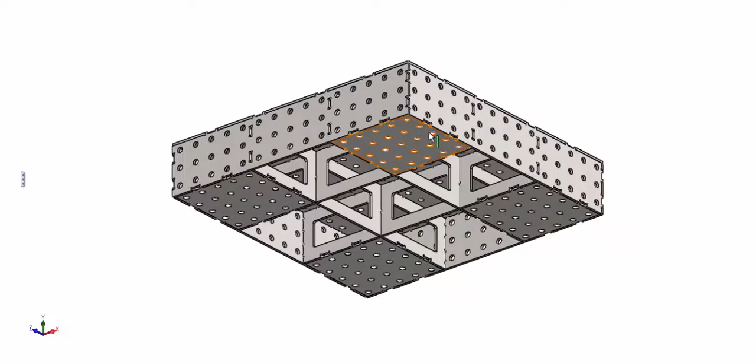Hey, it's Dave here from Tab and Slot, and today we're going to take a look at the assembly process of one of our new CertiFlat fab blocks. Okay, this is a 30-inch by 30-inch fab block. All of our standard fab blocks are 6 inches deep and have mounting surfaces on 6 sides. So you can configure these things numerous different ways and bolt them together.

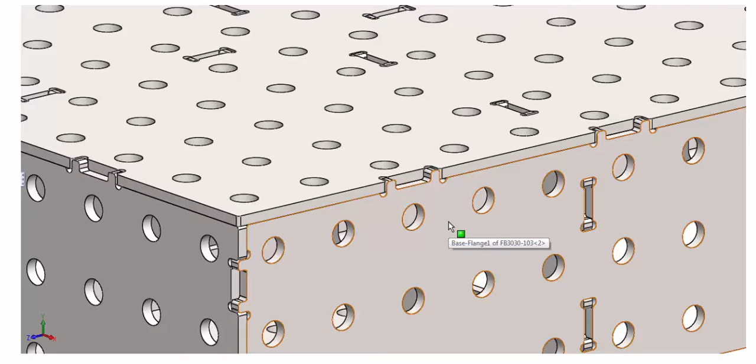You get the idea. So by now you've received your fab block kit, and you'll notice that the quality of the edges and the precision of the fit is absolutely phenomenal. Okay, it's important to understand that these parts came off of a CNC laser. Often we don't think of a sheet laser or a tube laser as a CNC machine like we would a Haas mill or a big turning center or lathe.

But the truth of the matter is, our published repeatability is 4/10 of a thousandth. Okay, so 4/10, that's 40% of 1/1000th of an inch. That's pretty tight. That's our repeatability. And we hold plus or minus 3/1000ths every single day on a lot of parts.

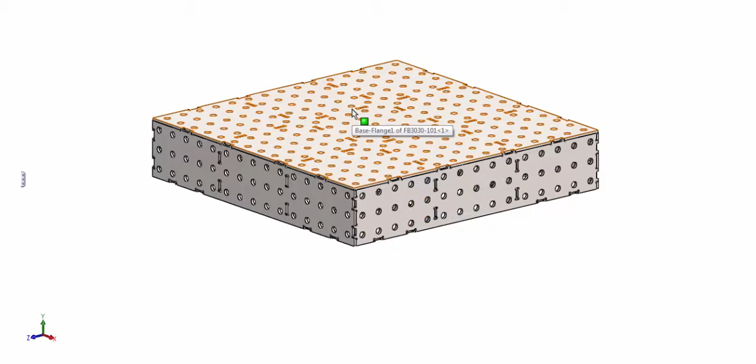So the idea behind the tab and slot philosophy and what makes our CertiFlat tables so incredibly stiff, strong, and flat is the use of tab and slot methodology, where we allow our high precision machine, our CNC laser, to do the work of setting the part flat and square. So if you understand that we want to let the laser do the work, then that kind of dictates our weld sequence a little bit. So let's take a look at how we put this together.

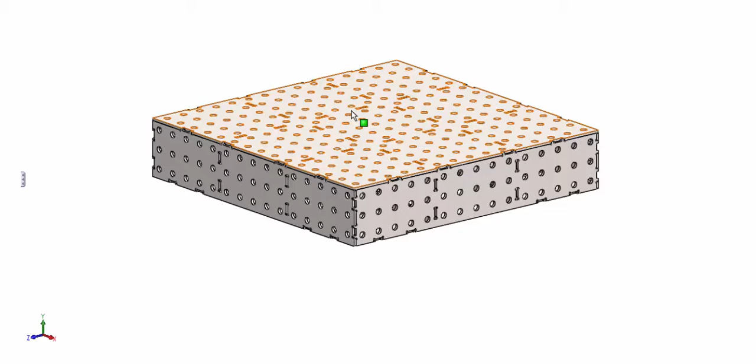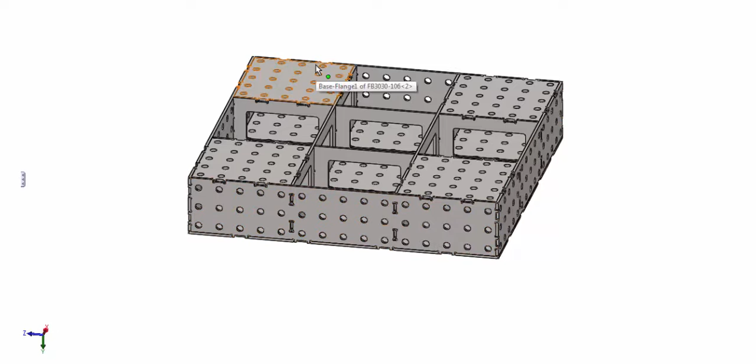Again, this is our 30 by 30 kit, and what we're actually going to do is flip this over. Now when I build these, I put them up on a workbench or on a pair of sawhorses or on top of a toolbox, but don't put it flat down on the table. What we want to do is put it up on a couple of 2x4s, okay? And let me just hide a few components here and get these out of the way so we can see what's going on here.

So the idea here is to put the heat where it can do no damage, okay? The first thing we want to do is build this structure and get it clamped to the top. So we're going to put the top down on the boards and build this upside down. Now, there's no mistaking how this stuff goes together. If I isolate these two parts, better yet, if I explode, let me do that for you here real quick. That'll be a little easier.

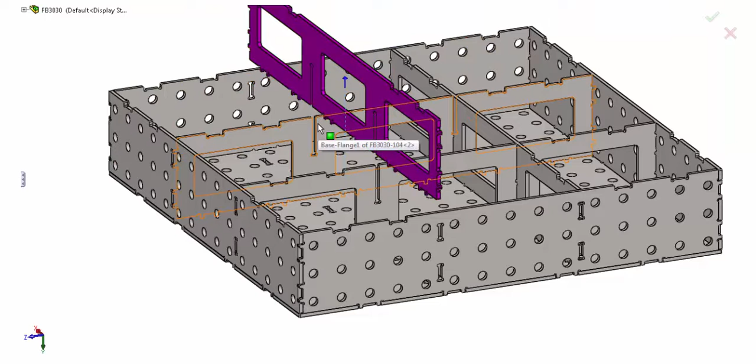So if I just move this rib up so we can see what's going on, you can see this can only go together one way, and it's pretty obvious and logical. So what you're going to do, move that back down, is you're going to put these 4 pieces together and put them into the slots in the table, okay? Then you're going to put these 2 end pieces on, and then these 2 end pieces, okay?

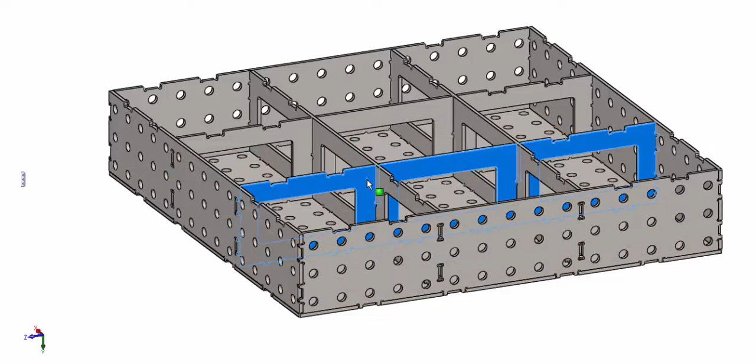Now, the goal here is to clamp all of these pieces that lie in the vertical plane tight to the tabletop, okay? Again, our precision is excellent on the laser. Sometimes there's a little burr, a little dirt that you may have to take a quick file and knock off, and the goal is to make sure that there are no gaps anywhere.

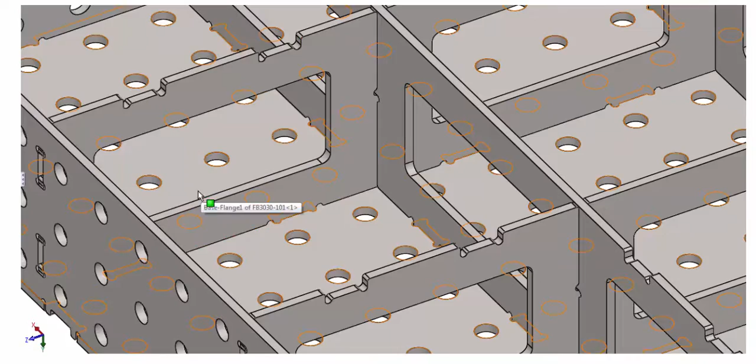And the best way to do that is to take a flashlight on the other side, shine it down at the gap, and take a look. If you can see anything more than a trace of light under there, then you need to pull this back apart and look for a burr or a fit-up problem, okay? So the way we do this is we get some 7-inch long 3/8 carriage bolts, which are very cheap. You can buy them by the pound at the Tractor Supply.

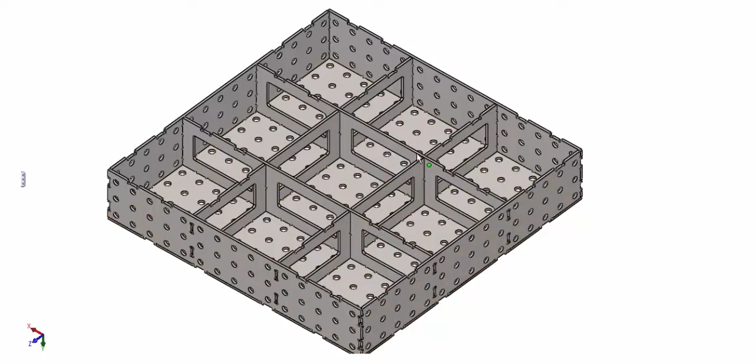And we put them up from the bottom, and then we take a couple of strapping plates and we go across these 4 intersections, and then we put nuts on. So we're going to put a bolt here in this hole and a bolt here in this hole, and then we come up alongside this. We put a strap across the X and tighten it down, because we don't have clamps that'll reach over there.

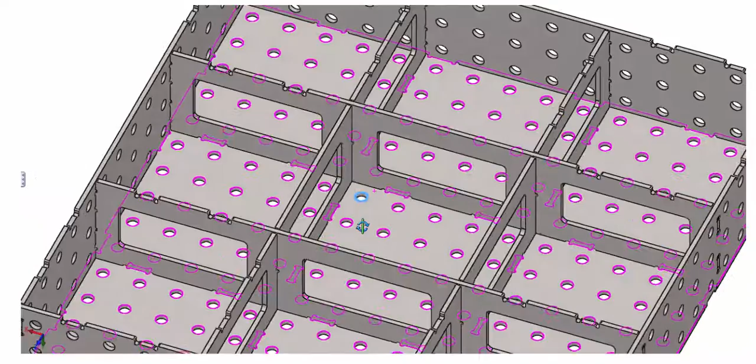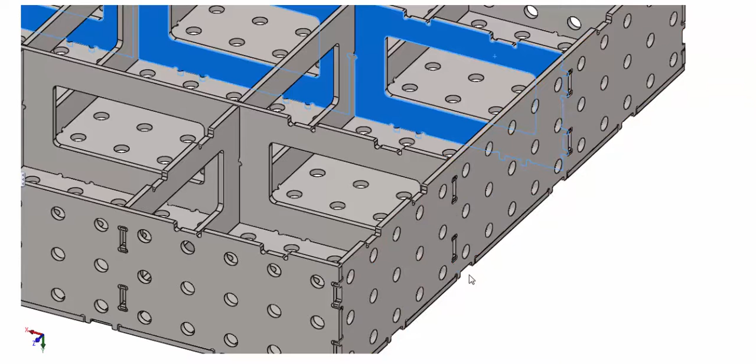Now, if you've already picked up some Strong Hand tools, you could actually just use those upside down here and screw one in there and use the pad right there and push down, okay? So what we want to do is get everything clamped to the table. Okay, the problem with that is this piece right here, because it's only tab and slotted onto these two things, it's not completely captured on any edges. If I just start clamping down on this, it's probably going to pop out here at the bottom.

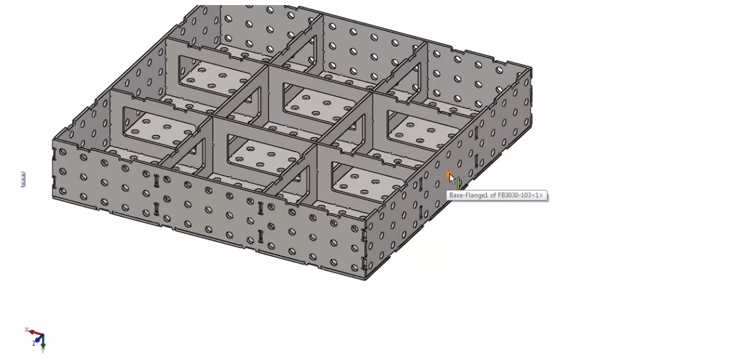Okay, so what we need to do is we need to hold these two pieces tight to these two pieces. And the easiest way to do that is to take a piece or a couple of pieces of long threaded rod, put them right through there with nuts on both sides and tighten it down. Okay? Now you want to be as close to here as possible, so use like this hole and then like this hole for this one, or this hole is actually a little bit better because now you'd be between here

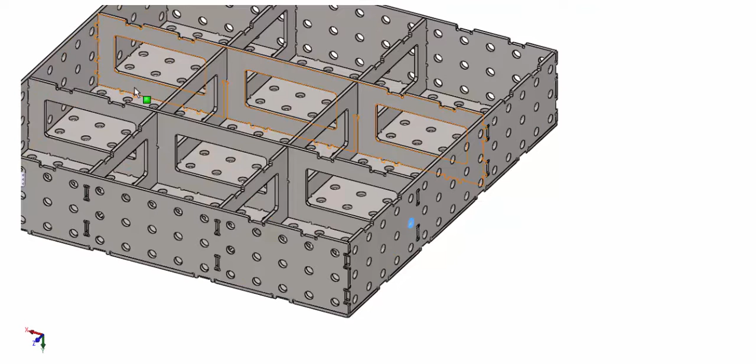and here, right? And the other thing you can do is you can put a couple of eye bolts through a couple holes and use a ratchet strap across the inside. If you have a bunch of pipe clamps, like woodworkers pipe clamps, you put those across the bottom. Okay? Everything's clamped to the top. The sides are pulled in tight against the ribs.

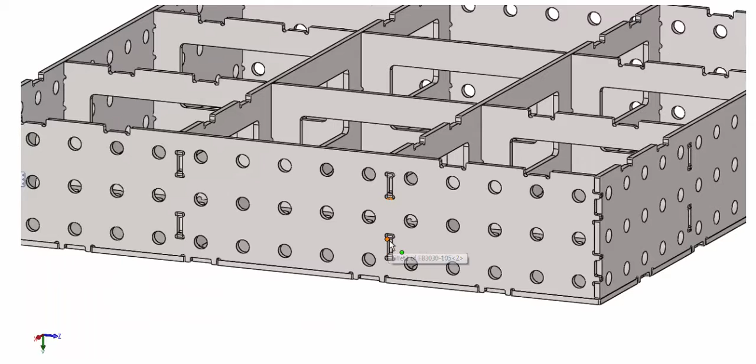Here's what you're going to do. You're going to come in here and you're going to put a little tack weld here, a little tack weld here, a little tack weld here, a little tack weld here. So we want this structure to be solid and clamped, but we don't want it attached to the top yet.

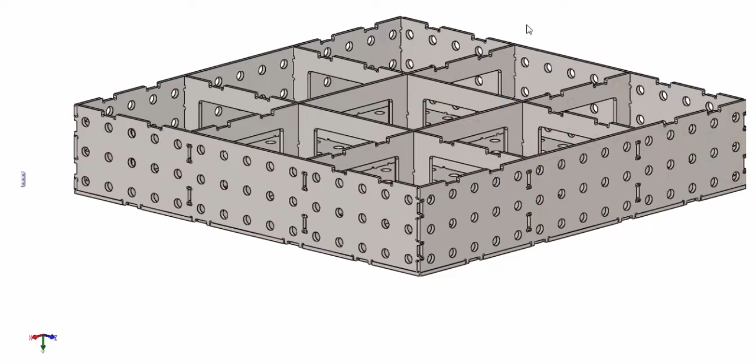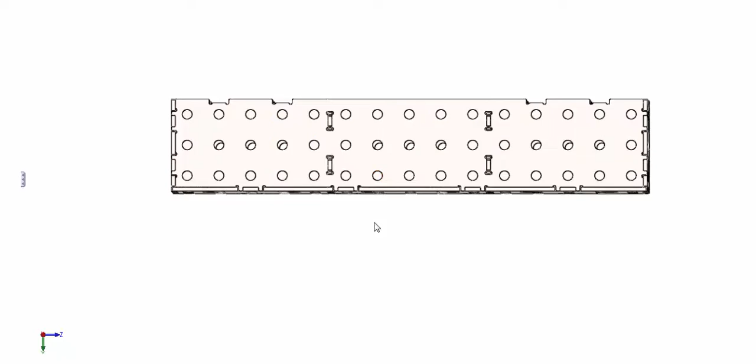From there, you're going to lay straight edges across the surfaces. Make sure it is in fact flat. You can still do all of this from the bottom. Lay your straight edges. If it's bowed down like this, right? Here, let me change views. If this is bowed down like this, then what you're going to want to do is put a block in the middle and thump it with a hammer, check it again, all before you weld it. And the idea would be to get it as flat as humanly possible before you weld.

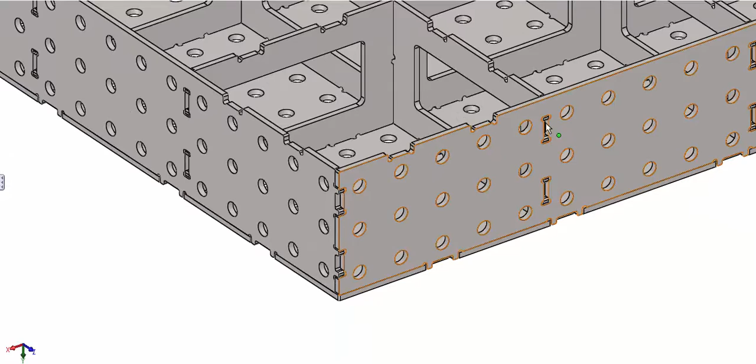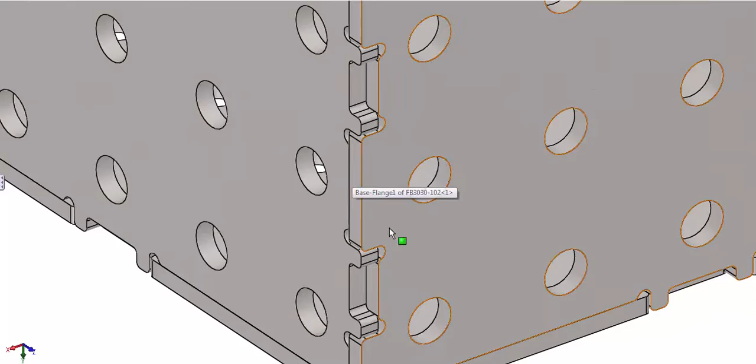Okay? Once you've done that, it's flat, it's clamped, your sides are tacked really good to these pieces. Next, we want to tack these corners together. So what we'll do, because this is all tacked up, everything's in the table, we're clamped down tight still, we want to come in here and throw a tack in each one of these corners. Okay? Once we've got this entire structure tacked together, we're clamped to the table, we've done all of our light gap checks everywhere, it's good to go. We're sure it's good to go.

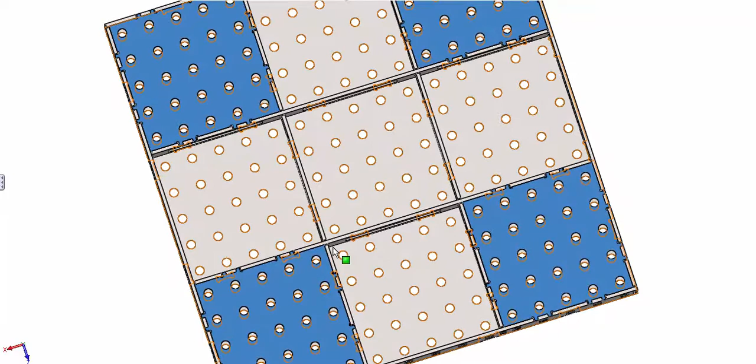Okay? The next thing we want to do is we want to go ahead and plug in these corner pieces. Okay? Now, you probably are going to have to move a clamp. I should have said that, right? Maybe reposition your clamp. If they were here and here, you're going to need to move them from here and here, right, to get them out of the way.

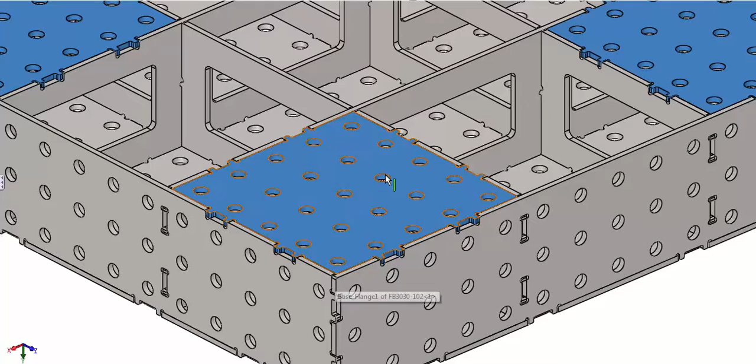Also, not shown in this video, on these plates that are blue in the video right now, one corner has a large radius. Okay? That corner needs to go to the outside because these plates are not symmetrical. Okay? They can be installed backwards. So you need to check that. And what that does is, like I said, it's not shown here, but this corner will have a big radius in it. That just makes sure the whole pattern is set where it needs to be.

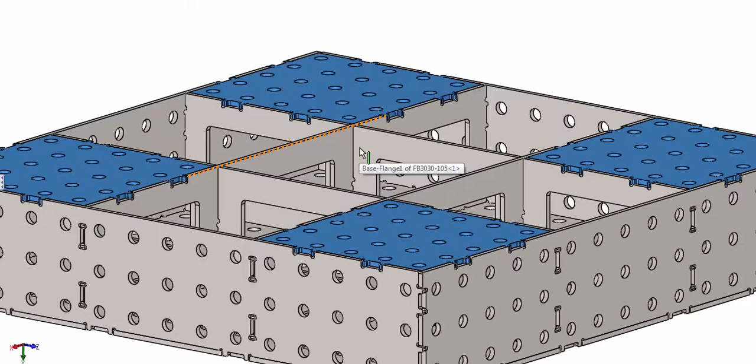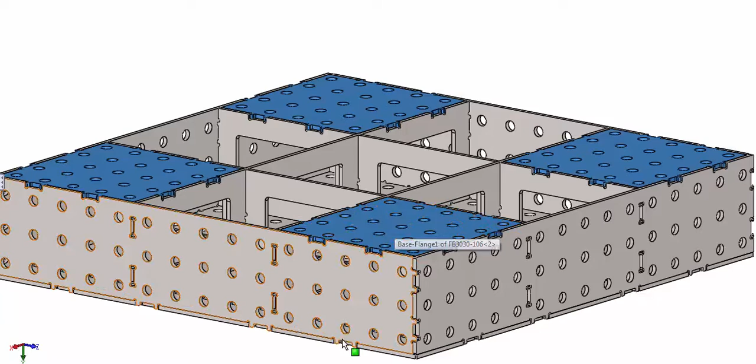Okay? So now we're going to put these four in. You're probably going to have to tap them in with a hammer. I don't want to say pound because you shouldn't have to pound them in, but you probably are going to have to tap them in. Okay? And you can see how once you have those in, the squareness is 100% set by the laser. Okay? The flatness is 100% set by the laser. So you're going to take these guys, do the same thing, find some way to clamp them to the top, right?

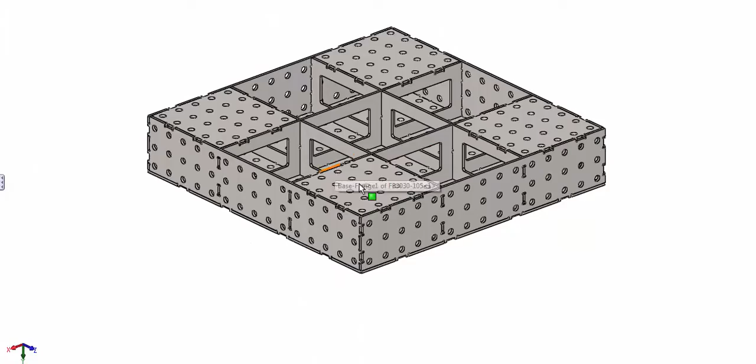So you're going to have this clamped to this and be squeezing all of this together. Okay? A couple of bolts up through the bottom, C-clamp over the top, whatever you want to do. And go ahead and let's tack these in. Tack, tack, tack, tack. Okay? By the time you have all that tacked, and again, we're using our best practices, we're going to tack down in here so we don't have to grind. This thing is going to be so stiff and rigid, it's not even going to be funny. Okay? Real simple from here.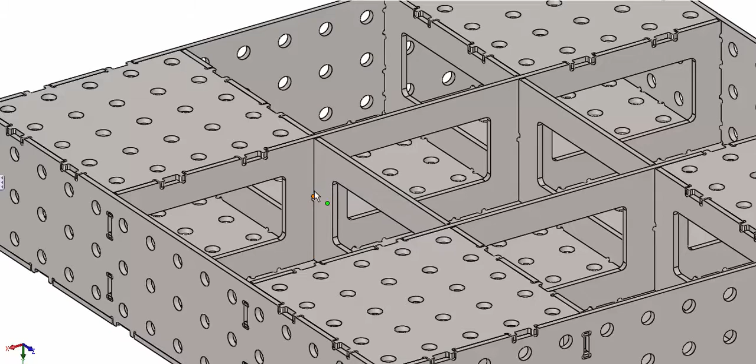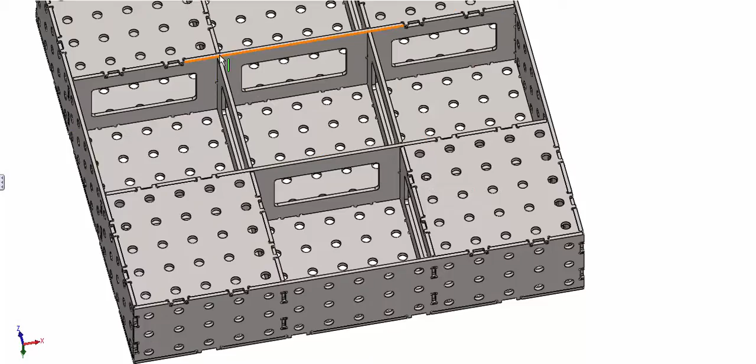The next thing we're going to do, we're going to come across here and we're going to weld the inside. Now, the way you do this is you're going to put like an inch right down the middle here, across this joint, so 1 inch, and then while it's hot, you immediately come around to the other side and do the same thing. Okay? Now, while this one's hot, before it's cooled, you move kitty corner and you do this one. Then you do this one, then you do this one.

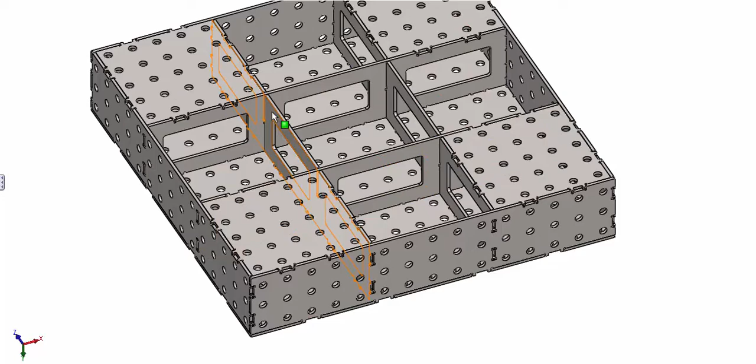Okay? Once you have those welded, we are not, absolutely not, going to weld this rib to this top. We're not welding any of this ribbing to the top. You don't need to do that. You've still got your clamps on. Everything's clamped tight. Okay? From here, once you've got these welded up, what we're looking to do is firm up this structure. Okay? So now you're going to weld here.

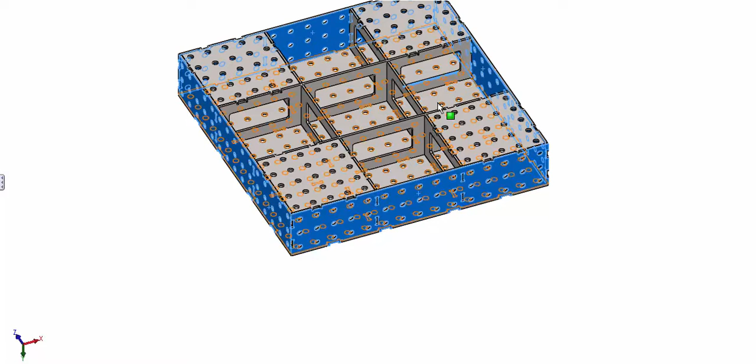Then you're going to move to the other side of the table, do the same thing. Come back over here, do this. Move to the other side of the table, do this. And get these 4 sides firmly connected to this inner structure. I'm going to turn all this blue. Okay? So you want to get all of that connected. Once all of that's connected, now we're going to flip this over.

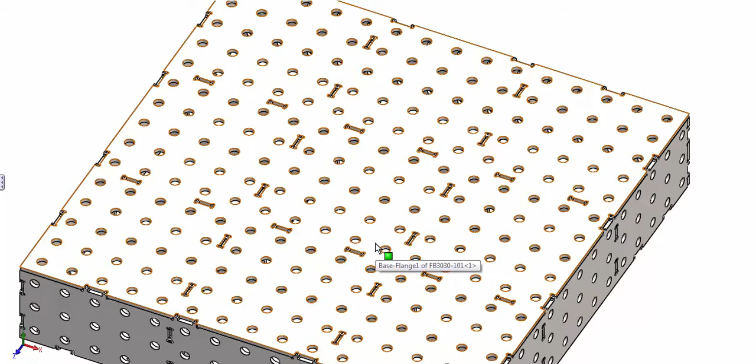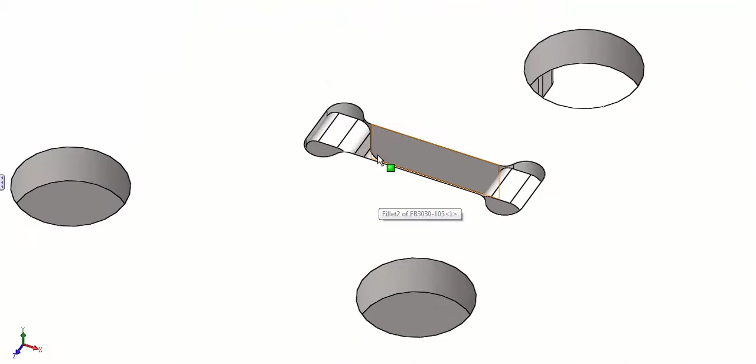With everything still clamped, we're going to check it one more time, because believe it or not, even with that structure welded, if you were to smack it with a hammer, you could move it 3 or 4 thousandths if you needed to. Check it, right? Now, we're going to start in the center, we're going to go kitty corner, work our way from the center out, and we're going to go tack, tack, tack, until we have a tack in every slot. Again, stay down inside here. You won't have to do any grinding.

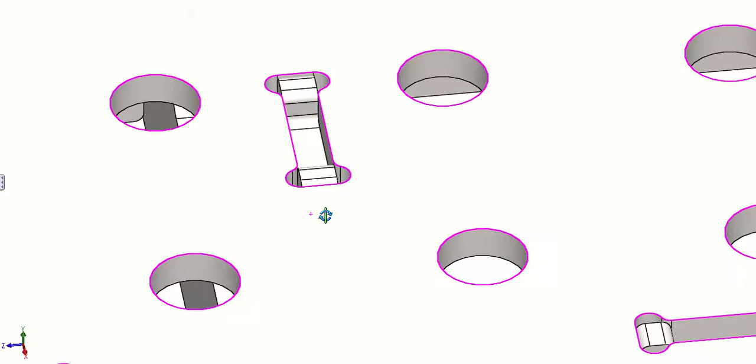Once these are tacked, okay, we can go ahead and start just finish welding. As soon as that's welded, we can go ahead and just start finish welding, okay? I usually do these last just to save me flipping it over one more time. The goal here is to put a weld down in this slot that hits all 3 surfaces in here, but does not come up above the top, so you don't have to grind. If you don't have to do it, why do it, okay?

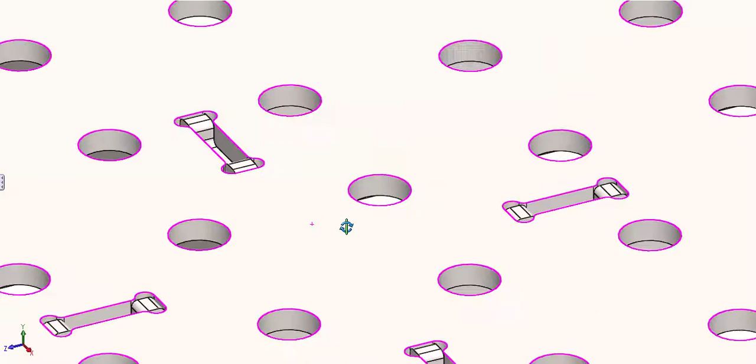So if you're MIG welding, if you're wire feed welding, most of you are, aim your wire right down the center of the slot, start your puddle up against this face, and as soon as you have a puddle, move just enough to leave this slightly dished or undercut. Okay, and again, start from the center, go kitty corner, work your way out.

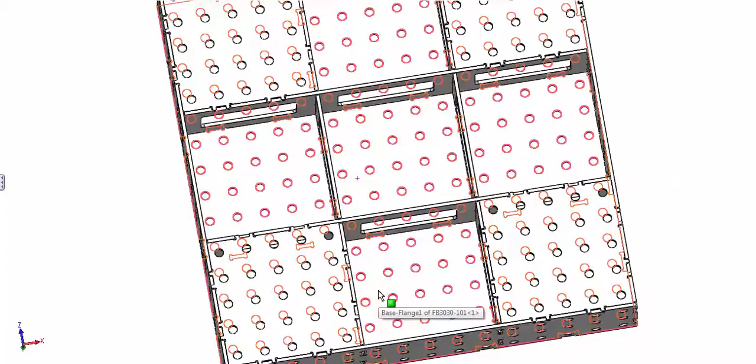Once that's done, flip it over for the last time, and go ahead and weld these guys up and use the same mentality. This goes corner to corner. You lay a beautiful little bead in here. You don't have to grind anything.